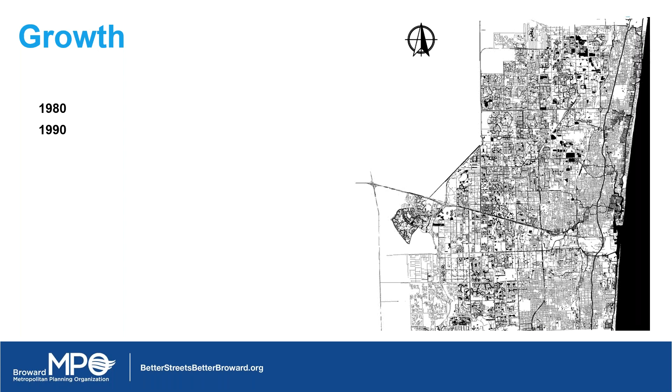A quick look at Broward since 1980. This is really when a lot of things happened. We experienced some rapid population growth, especially in Southwest Broward, which is closer to Miami-Dade County. New types of development occurred. We're starting to see some different development patterns happening here. A lot of cul-de-sacs, a lot of gated communities, not really conducive to walking and biking. Our population in 1980 was about a million, and now, as of 2019, we're close to 2 million. So we probably doubled our population in the last 40 years.

So to keep up with this population growth, the Broward MPO and its partners, the cities and the county, invested heavily in our transportation system. New roads were constructed to high capacity. Existing roads were widened from 2 lanes to 4 lanes, 4 lanes to 6 lanes, and in some cases, we actually widened our roads to 8 lanes. There's a few roads in our transportation network that are 8-lane divided roads. Not much consideration was given to other modes of transportation.

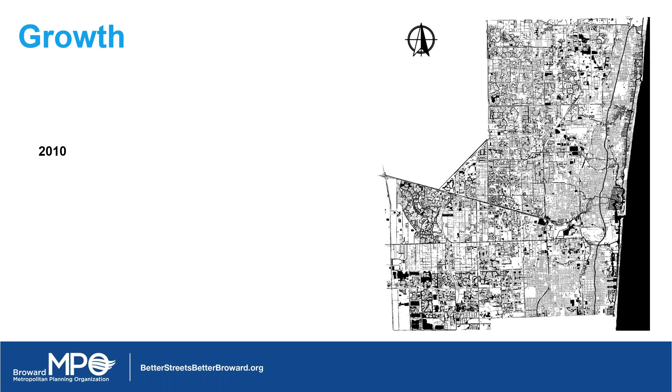In the late 1990s, our MPO gave us direction to look at alternative ways to add capacity without having to add additional lanes. As moving vehicles was the priority back then, and as the smart planners that we were, or thought we were, we expanded our intersections. So we added free flow right turns, dual rights, dual lefts, creating an environment that's really not suitable and doesn't encourage people to walk and bike. It was definitely carrying a lot more cars. It was definitely more efficient for automobiles, very, very difficult for people to walk and bike.

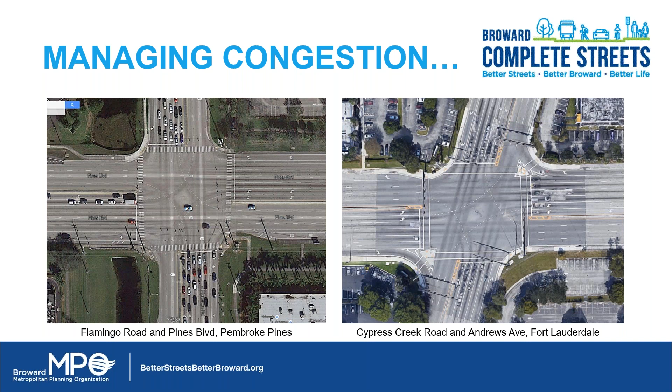However, everything changed with the adoption of our 2035 long-range transportation plan. This plan was adopted by the MPO board in December 2009, and it really changed the way we do our planning here in Broward. It created a paradigm shift, if you will. It focuses more on moving people, not necessarily vehicles. For the first time, it allocated a lot of funding for other modes of transportation, not necessarily capacity improvements.

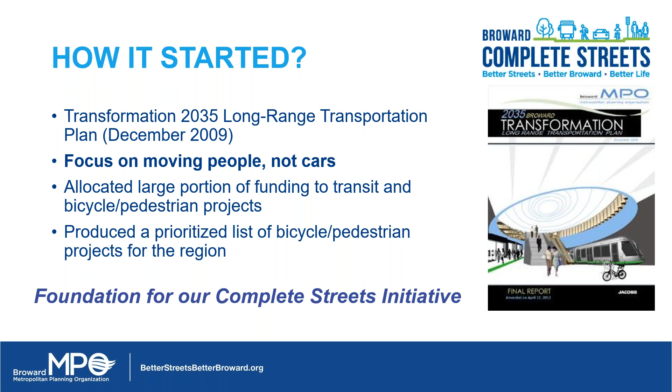About 70% of the funding allocated in this plan was for modes other than the automobile. Complete shift from the past. Typically, capacity will carry about 60 to 70% of the funding, with the remaining to other modes of transportation. And for the first time ever, we did have a list of bicycle pedestrian improvements. In the past, the only way we could actually implement bike lanes and sidewalks was through a capacity improvement. So this clearly changed the way we do our planning here in Broward.

Quickly, I guess we all understand complete streets, but even at that time it was sort of an emerging concept. We heard it was coming out of LA County. Proven results. The data was showing that when you plan, design, and operate streets for all users, you get all these benefits. First and foremost, safety. You create healthy communities. You definitely improve the economic vitality of your area. So we found that the benefits actually were something that we wanted to promote.

Kristin Jacobs, a former MPO board member, directed staff to look into this concept and really find ways to implement it here in Broward. So she became the champion of complete streets in Broward County. So now we have this concept that we want to promote. We have a list of projects from our 2035 long-range transportation plan, and we have funding. So what do we do next? These are the steps that we took to actually try to implement the complete streets concept here in Broward.

We developed an education and training program, which became the Complete Streets Initiative. We developed a process in partnership with the Florida Department of Transportation District 4 office called the Mobility Program to get projects from planning to implementation. And we established good partnerships with the local governments, the jurisdictional owners. We actually needed to get their buy-in so we can implement projects. The Broward MPO does not own real estate, does not own any roads. So we need to make sure that the partners are on board with this concept so we can implement this type of improvements.

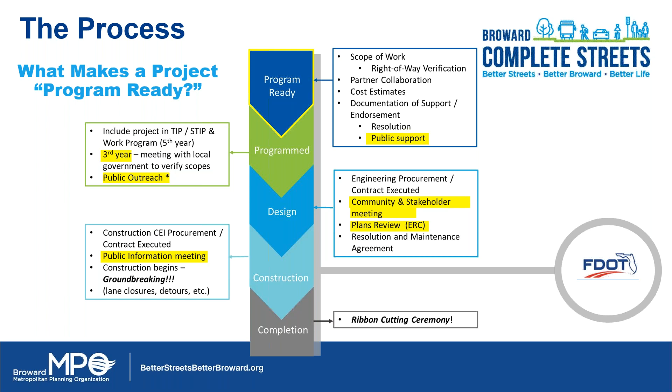You know, we're very lucky here in Broward to be working with a very progressive, innovative FDOT. The District 4 office has been one of our most important partners since we established the initiative. They have embraced the concept of complete streets. They have updated internal documents, developed new documents and processes, all in an effort to make the street safe for all users.

So I'm going to turn it over to Brad Salisbury, who will provide a little more information about FDOT's efforts, including the lane elimination process that was established here and piloted here at the District 4 office. And he'll also highlight some of the projects that include those spectacular 7 strategies. Brad, turn it over to you.

Thanks, Ricardo. Yes, as Ricardo mentioned, I'm Brad Salisbury with the Florida Department of Transportation District 4 Design Office. We are located in Fort Lauderdale. As Ricardo mentioned, I wanted to highlight the mobility program, sort of those steps after the MPO takes to make sure the projects are program ready, and just highlight how this mobility program is really advancing complete streets in addition to the spectacular 7-step countermeasures that I'll highlight. Ricardo mentioned lane elimination. I'll touch on that a little more in depth.

So before I got into the mobility program, sort of concurrently while the MPO was thinking about complete streets and really rethinking how these roads in Broward are working, FDOT as a whole was developing what we call context classification. And this was just taking a step back from the strict urban-rural separation that had been used in the past, and break down those roads a little more in depth into categories. Everything from C1, which is the natural park area, all the way to the C6 urban core.

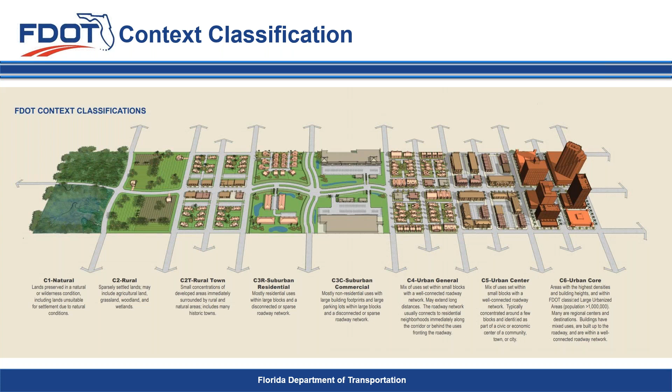So when you're looking at what makes sense in the urban core, that may not be a complete street for the C1 natural area. So really tailoring the complete street concept to better suit that area that we're serving, and everything in between, from your rural town to more suburban areas, and as you get more and more dense to your urban core.

So this context classification determines a number of roadway design criteria, everything from lane width to your design speed to your sidewalk width. Our Florida Design Manual breaks down all those criteria into the categories for C1 to C6. And as part of this context classification effort, DOT conducted a statewide effort to assign a context class to each road. This was more of a 10,000-foot view of maybe looking above on an aerial of, okay, this area is definitely a C1, a natural area. Okay, this is urban core, and what we call the statewide provisional context class.

And as a project comes through and we have the chance to further refine that, we have a process that I'll outline below. It's utilizing the multimodal scoping checklist. So after the statewide provisional context class is set, the multimodal scoping checklist is created by FDOT, where we'll really look at more of the street view level analysis for the road. So getting down there and really seeing, okay, what is this, a suburban area? Is this more of the rural town? Less of the 10,000-foot view and more of the street view. And we'll assign its context class at that point for the project.

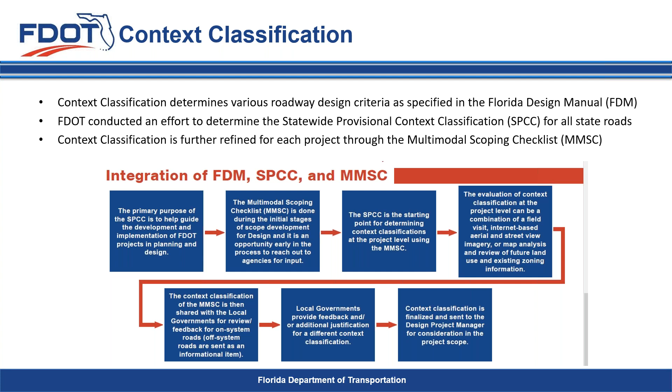Now we provide the local governments this provisional context class and give them the chance to give us feedback. And sometimes a discussion will happen, and the city or county may have different plans in the future for this roadway, and a final context class is sort of set for consideration into the project scope. So this is important because it sets those criteria early before the design project begins of, okay, what are our widths going to be in developing the project further down the road?

So now I'll take a step back to the mobility program and kind of highlight what we're doing for the Safe Transportation for Every Pedestrian countermeasures. In this mobility program, these are often included by request of the local agency or through an FDOT safety study or a safety review for an FDOT project where these countermeasures are identified for incorporation into the projects. Or sometimes it could be just a local agency making a one-off request and DOT conducts a separate study to

incorporate them. The countermeasures, as Dan highlighted before: the raised crosswalks, crosswalk visibility enhancements, pedestrian refuge islands, pedestrian hybrid beacons or HAWKs, the leading pedestrian interval, rectangular rapid flashing beacon or RRFB, and road diet. I'll touch on that last one a little more in depth, but I'll briefly run through the first six.

So as I mentioned, incorporating these STEP features into the mobility program and Complete Streets projects is really a partnership between us, the MPO, and local agencies. I've highlighted the raised crosswalks; one key feature was implemented on a non-state road, Old Dixie Highway in the city of Fort Lauderdale. That was a partnership with the MPO and the city of Fort Lauderdale to really make that a more walkable, complete street for the community, and it incorporated several raised crosswalks.

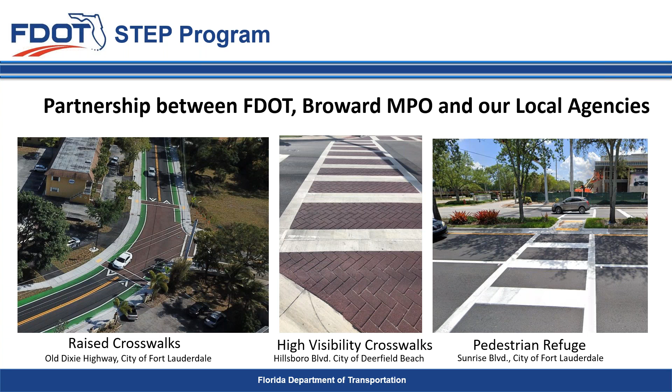Pedestrian hybrid beacon, or the HAWK, we do not have any installations of those in Broward County, but we do have those at other places in District 4. We cover five counties in South Florida, and the five installations we have in our district are all in St. Lucie County along A1A.

The STEP countermeasure is really a leading pedestrian interval, and we have several locations in the district with a leading pedestrian interval, but I just wanted to highlight the exclusive pedestrian phase we do have active at some extremely high volume pedestrian areas like this beachfront A1A in Fort Lauderdale. That gives an all red phase where all pedestrians are crossing.

And to go to a different section of A1A, in Lauderdale-by-the-Sea we have the RRFB installation. This was by request of Lauderdale-by-the-Sea, a heavy beach access route that was being utilized and really needed some additional assistance for the pedestrians to cross. So that was done as a project by FDOT for Lauderdale-by-the-Sea.

And the last, and what I'll dig into the most, is what we're calling lane repurposing. It has a few different names: lane elimination, road diet, lane repurposing. DOT currently calls it lane elimination, so I'll refer to it as that. But we are working, at DOT's statewide level, on a repurposing guidebook that I'll highlight on the right. This process is currently outlined in the Florida Design Manual to guide applicants through. The upcoming lane repurposing guidebook is still going to follow the same process generally. It just gives a little more background information.

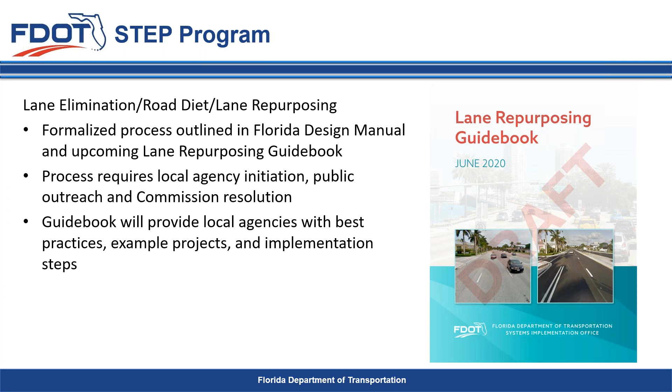So just to highlight the number of lane elimination projects we have in our district, we actually have 29 state road projects in various degrees of completion. Five have been fully constructed, and the other 24 are a mix: they've been identified as potential lane eliminations or approved.

Inactive, meaning the locals had once looked into it but withdrew that application. Or active, they're currently going through the lane elimination process. So these are the 29 state road projects. I'll highlight the 29 non-state road projects on another slide, just to give a better view of how this whole region is really active with almost 60 projects of lane eliminations in one stage or another.

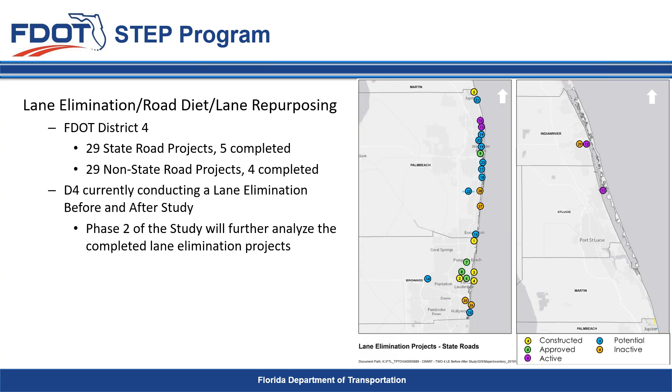And as we've had time to assess those 5 completed projects, we're conducting a before and after study. DOT District 4 is. Phase 2 of the study is going to dig a little deeper into those completed projects to see tangible cost benefit type analysis. Phase 1 really got feedback from all our partners on how those are performing in the years after, but we really want to have hard data on how these are working out to help better manage the 50 odd projects that are coming through the pipeline.

These are the 29 non-state road projects I alluded to. Some of these, DOT has an active role where we're actually designing and constructing. Others are solely on the local agency, but we did want to capture every project in our region that's going through this. As you can see, the vast majority are in Broward County. So definitely the local agencies in Broward County have been more aggressive at pursuing lane eliminations. We do have a couple in Palm Beach County.

So I wanted to highlight a few of the lane elimination projects in a little more detail. This was on a state road, Hillsboro Boulevard in Deerfield Beach. This actually started as an FDOT resurfacing project. Through discussions with the local agencies, namely Deerfield Beach, the lane elimination scope was added into the resurfacing project. We used shared funding since DOT was coming with resurfacing. It could facilitate that cost for lane elimination a little bit, but we did have Deerfield Beach contribute some

funding to the project. In the final project, you'll see here on the right that we installed a bike lane and a landscaping strip with that eliminated lane. And that is completed. I was actually the engineer of record during construction, and we've definitely gotten some good feedback from our local agency partners on this one. It's being used as one of the example projects in the draft repurposing guidebook.

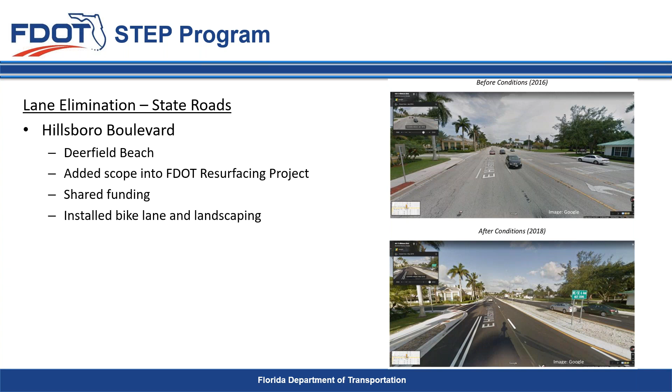Another one on a state road was A1A in Fort Lauderdale. This actually started as part of a Hurricane Sandy repair project. A large section of A1A was washed out, and first emergency repairs were done. But as we met with Fort Lauderdale and focused on how we should remake this road, we took that opportunity to re-envision it for what the city saw. And part of that was incorporating a lane elimination.

I'm unsure if it was actually the first, but it's one of the first lane eliminations that was done, and it also included shared funding. With that eliminated lane, we had a bike lane, median, and many decorative improvements funded by the city of Fort Lauderdale.

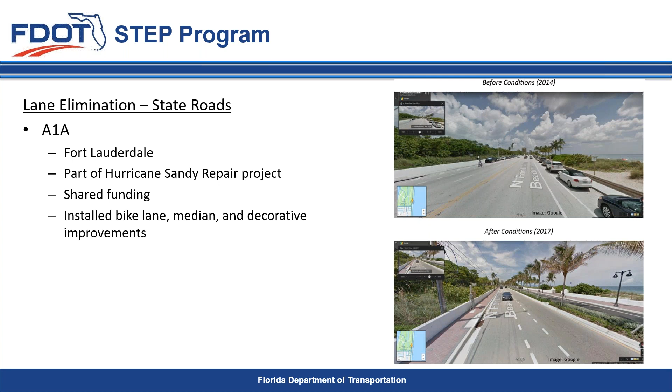Just to highlight a couple of the non-state road lane eliminations, we have Northeast 13th Street. This was solely designed and constructed by the city of Fort Lauderdale. It was part of a larger network of lane eliminations, including one that DOT had worked on, the Old Dixie Highway project. The city revitalized that whole area and corridor with this project, and added a bike lane and median, including landscape features. You can see on the right that green bike lane is continuous throughout.

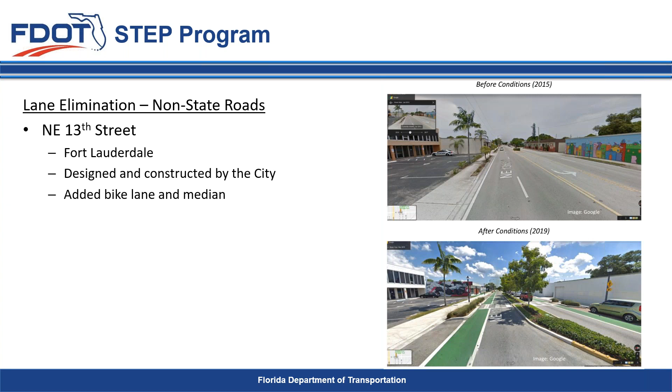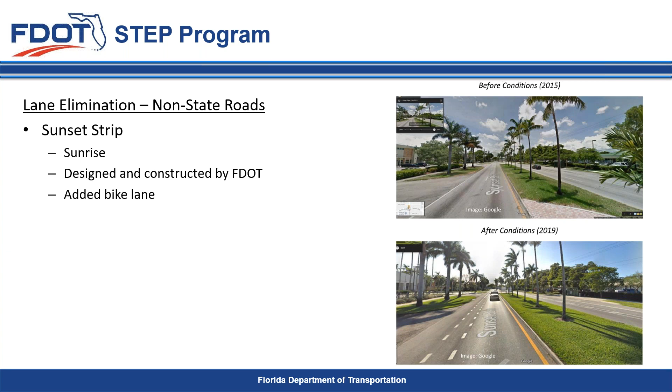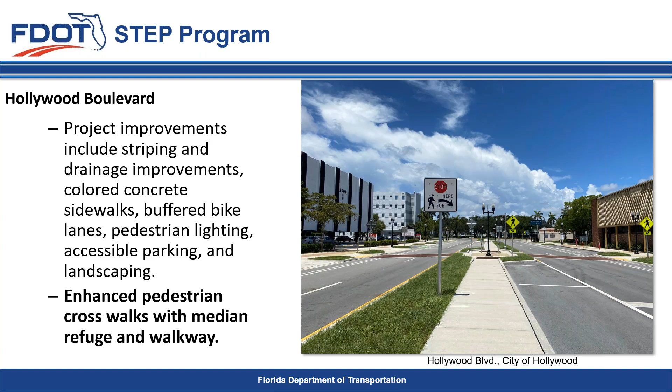spaces and landscaping. The key feature was the enhanced pedestrian crosswalks with a median refuge and walkway down the center of the project. And that's been constructed. Some future landscaping is still pending, as you see in this picture, but it's been a great example for the rest of the county and our district for what a complete streets project could be. With that, I'll hand off back to Ricardo to discuss that project a little more in depth.

Thank you, Brad. Yeah, the Hollywood Boulevard project in the city of Hollywood was actually one of 2 complete streets demonstration projects that we selected. We wanted to show how context plays a big role when selecting the appropriate treatments. Although the concept is the same, the treatment may vary depending on the context of your road.

The Hollywood Boulevard was our urban demonstration project. Believe it or not, that's as urban as it gets in South Florida and in some of our cities here in Broward County. The destinations are a little different. They're retail, office, restaurants, shops, and actually this one provides direct access to the city hall.

Ricardo, I'm sorry, I hate to interrupt. We don't actually see your screen yet. Could you see if you have that show my screen button? Sorry. I got it. I apologize. I didn't realize. Can you guys see my screen? Got it. Yes, so thank you.

The same thing applies. Basically, this is an urban complete streets demonstration project in the city of Hollywood. Like Brad said, this is not complete. It's still missing a lot of elements. Through our partnership with the city of Hollywood, they were responsible for the landscaping, some hardscaping, some furnishings that are coming up, hopefully at the end of this year. And of course, it's missing a very important element: the trees, the shade. It's very hot here in South Florida, so we need to make sure that gets implemented soon.

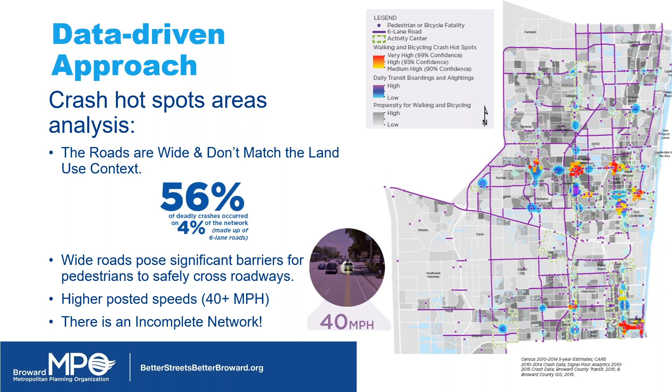We developed project fact sheets for each area selected. We conducted field reviews during the morning and also in the evening to identify pedestrian and bicycle safety related issues for each site. We worked with a lot of partners, including municipality representatives, elected officials, school board members. Some of our residents came out and walked with us as well. AARP, Broward County Transit, the Florida Department of Transportation, and law enforcement officers as well.

Some of the countermeasures that were actually recommended, common themes in many of these sites, include improved lighting, adding separations from vehicular traffic, maintenance issues, transit amenities that needed more shelters, and also that we need to include more mid-block crossings.

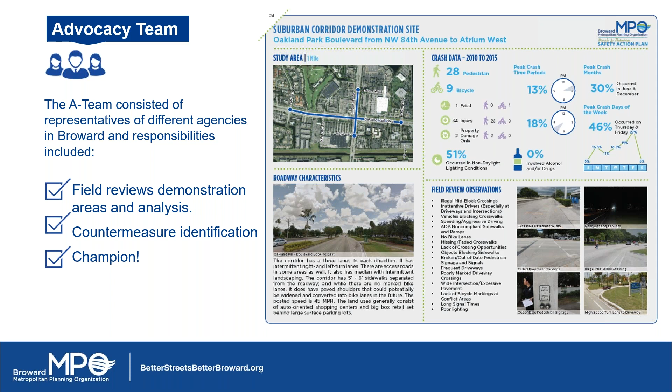Some of the findings: definitely there's an identity crisis between the road designs and user needs. Absolutely, that's also absolutely true. The roads are not primarily designed to provide a comfortable and convenient walking or bicycle experience. Absolutely, that's the case. It's more about how do we move vehicles efficiently and quickly. And many users of the systems are not following walking, bicycle, and driving laws. Not many people are aware of the actual laws that are in place. Strategic partnerships are needed to see the change.

So this is the outcome of the plan. It calls for some priority action items. Identify areas where bicycles and pedestrians are the priority movement. Implement a quick build program. That's something that we'll talk about in a minute. Align standards with bicycle pedestrian safety goals of the region. Institute a district-wide bicycle pedestrian safety program. And also create an education program with law enforcement that focuses on bicycle pedestrian laws.

So, this is the implementation part of the BIPSAP. These are the calls to action established by the BIPSAP. So first, set the stage. Identify areas in the county where bicycles and pedestrians are the priority movement. We're actually taking care of that with our complete streets master plan, which we'll show in a minute. Create safer streets. Implement the quick build program. We're in the process of establishing our first tactical urbanism program here in Broward County. We're hoping to have that stood up by the end of this year. We also recently updated our complete streets design guidelines to include recent standards and innovative designs.

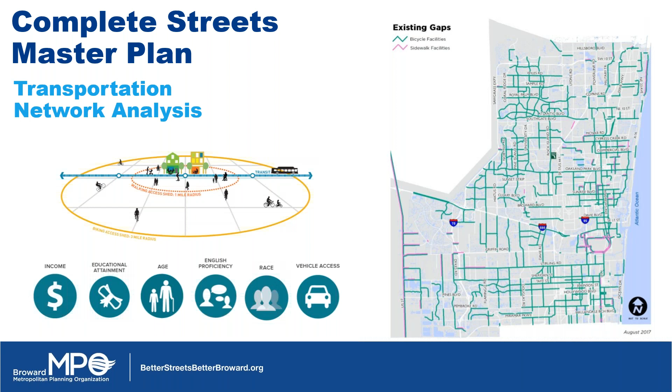Okay, the Complete Streets Master Plan, this is a direct result of one of the priority items from the BIPSAP, adopted in February 2019. We do have a more robust presentation, but we just wanted to make a couple of slides to show what exactly we did. We started with existing gaps. Where are the gaps in our transportation network? But the different thing is we also included what we no longer consider facilities, like 3-foot shoulders, wide outside lanes, or 4-foot bike lanes. We've seen that those facilities are not being used, so we consider those also as gaps.

We did a demand analysis. We looked at areas with higher number of destinations, employment, retail, shops, parks, trails, schools, and higher population density, and also transit. We overlaid that analysis with our equity analysis. The equity analysis considers demographic factors which, when combined, indicate where there are concentrations of historically vulnerable populations. The indicators that we used were income, educational attainment, age, English proficiency, race, and also households with zero cars.

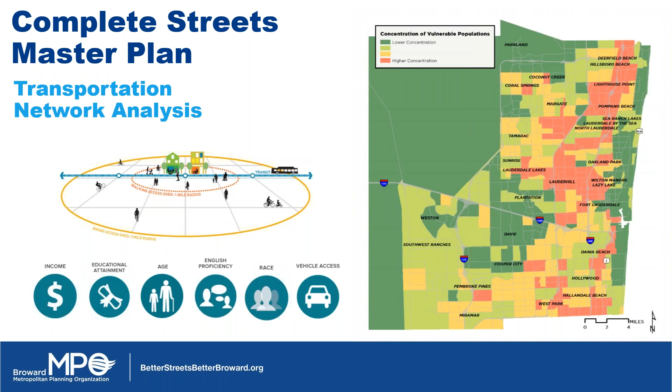When we overlaid the two analyses, this is what we came up with, what we call the bundle areas, where we create a tight network of facilities with higher number of destinations while prioritizing our investments in areas that have higher numbers of vulnerable populations.

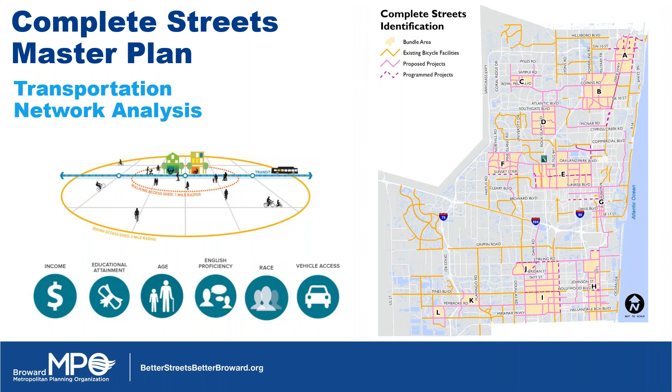The whole idea behind this bundle concept is really, sometimes we forget that we do more than just go to work. Only 20% of the total daily trips are work trips. Sometimes we forget that we go shopping, we go to the gym, we go eat out at restaurants, we go to our parks. And for some of us who have families, we have to take our kids to soccer practice, baseball practice. So it's almost like a second job. So the whole idea is to provide access to everyday destinations to people, so they can consider those different modes.

Right. As part of the Complete Streets Master Plan, we did have one of the most successful campaigns that we ever had at the Broward MPO. We interacted with over 1,300 resident stakeholders. Not typical in the planning world. Transportation is not sexy to some people, so they don't really participate when you're planning. They'll really come out when you're actually ready to design and construct.

So we utilized different methods of public outreach, but the most successful strategy was to leverage an existing relationship the Broward Regional Health Planning Council had with local communities through their Healthy Community Zone program. These are low-income areas that have historically been neglected. So we actually went to them. We got some good feedback from those community zones, and we were able to incorporate some of the things that they were saying into our actual recommendations.

Some of the things that we found are pedestrian lighting, traffic calming measures, and of course, people need shade. So overarching themes from the public outreach: people want connected networks, which we're addressing through our bundle areas on our Complete Streets Master Plan. They want access to everyday destinations, which we're addressing through our demand analysis. And definitely, they want those separations. They don't want to be right next to vehicular traffic. It's kind of dangerous, especially on higher speed roads.

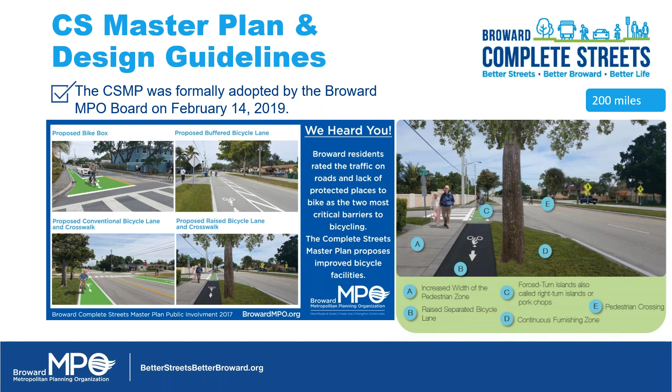So one of the most exciting programs that we have at the Broward MPO is our walking audit program. The whole intent is to get the community involved and get people to actually start walking with us before we start planning and scoping projects. So not only do we engage the public and stakeholders, but also our partners and engineering planners. We really need to start planning and engineering some of these projects from the user's perspective. So we need to walk and bike when we're actually designing these projects.

So Stephanie Garcia, who leads this effort, is going to talk a little bit more about this program and provide a little more information on that. So I'll turn it over to you, Stephanie. Let me know when you're ready.

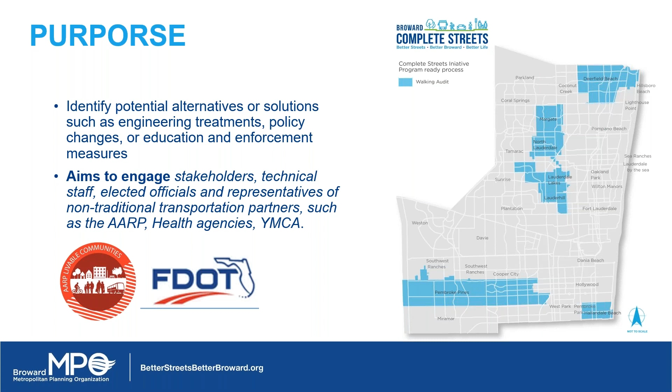Thank you. So to make this possible, the Broward MPO successfully funded the Walking Audits program through the Complete Streets Initiative. A question that comes to your mind could be how it works. The walking audits are coordinated with city staff and hosted in different locations, such as schools, parks, community centers, local businesses, depending on the urban context of the study area and the needs of the municipalities. So it is a flexible approach.

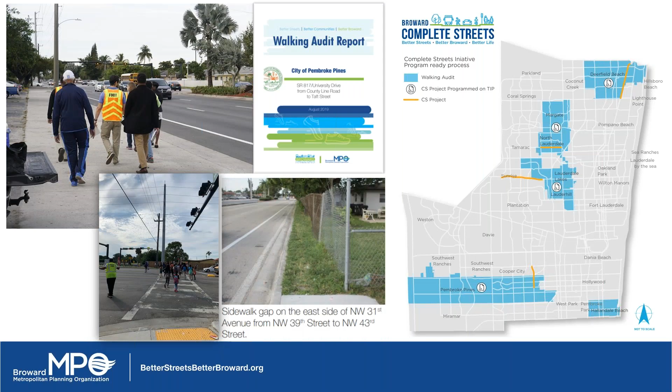Thank you. The walking audits help evaluate the walking environment, identify pedestrian and bicyclist issues such as safety, access, connectivity, ADA needs, comfort, and convenience when walking. With the help of participants, we identified potential alternatives and solutions such as engineering treatments, policy changes, education, and enforcement measures. All this information is compiled in a report that is shared with the walking audit participants, city staff, transportation partners, and jurisdictional owners of the road. This is an important part of the process, as they will actually implement the improvement.

As you can see in the photo, there is an example of one of the walking audits in the city of Lauderdale Lakes, where 3 schools are located: elementary, middle, and high school. There is a sidewalk gap and disconnection to the nearest bus stop, as you can see. This is a call of attention to act and plan for better streets. The Broward MPO uses guided feedback to inform the project scope, ensuring the needs of community members and stakeholders are clearly reflected in the final recommendations of the project.

And the good news is that in 2020, the MPO programmed for funding 4 out of 6 projects that belong to the first phase of the Complete Streets Master Plan, as you can see in the map, that included a walking audit. So of all the projects that were programmed for funding, 4 out of 6 included a walking audit. This shows that it was a successful tool of public involvement, getting the feedback of the community into the scope of the project. And right now we have 4 projects in the TIP.

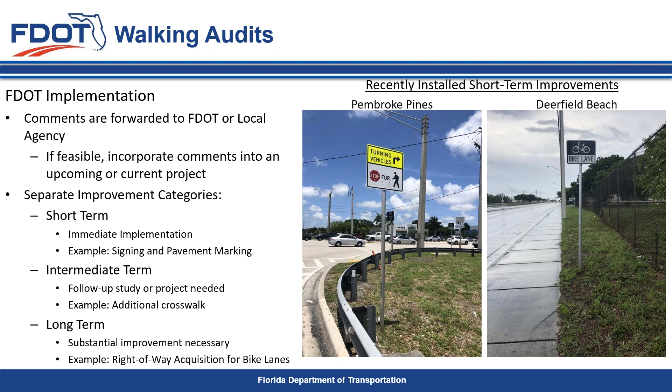And finally, we have long-term type comments that would be considered a substantial improvement. Perhaps right-of-way acquisition or widening the roadway for bike lanes would be considered these. For these long-term enhancements, we work with the MPO and the local agencies for potentially scoping a future project if deemed warranted, and it just helps highlight to the local agencies, the MPO and FDOT, at the street view level, here's what people are saying is needed. And I'll kick it off to Ricardo next to talk about what's coming up in the pipeline.

Thank you, Brad. Definitely, FDOT has been a great partner, even taking some of the recommendations regarding maintenance and operational issues that we identified through our walking audit. It's been amazing. So thank you for doing that. So what's in the pipeline? What's coming up? What's the result of our current efforts? And what do we have coming next?

Okay, here we go. So a mobility program. This is as of December 2019. This is through a partnership with the Florida Department of Transportation. We wanted to show you that we have projects in all phases of implementation. These projects were identified in many of our plans, studies, or other efforts, totaling approximately $300 million and adding about 195 facility miles to our network. This doesn't include the 77 miles that we're actually getting program ready for our Complete Streets Master Plan projects.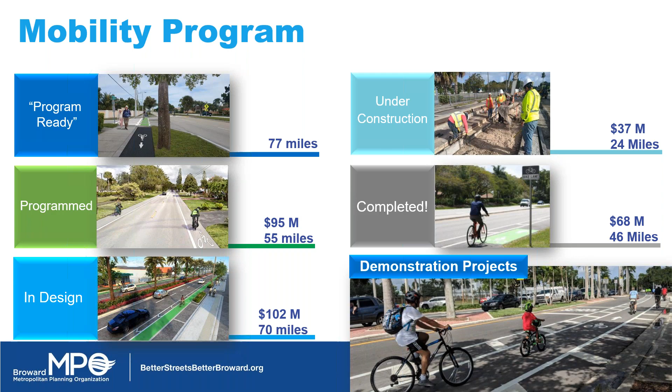So in addition to our mobility program, we have other funding mechanisms in place at the Broward MPO, and have also been able to secure other types of funding to allow us to implement these types of improvements. The mobility program is certainly not the only way to get projects funded at the Broward MPO.

So our Complete Streets and Localized Initiatives program is another funding mechanism we have in place at Broward MPO. It's a competitive grant program where we do a call for projects every year where local municipalities can apply for funding. These projects typically are lower scale projects with a maximum project cost of $3 million. This program was established in 2016. What you see here is only the projects that are on what we call our regional network, collectors and above. Through that program, we're going to be adding 20 miles of facilities to our network.

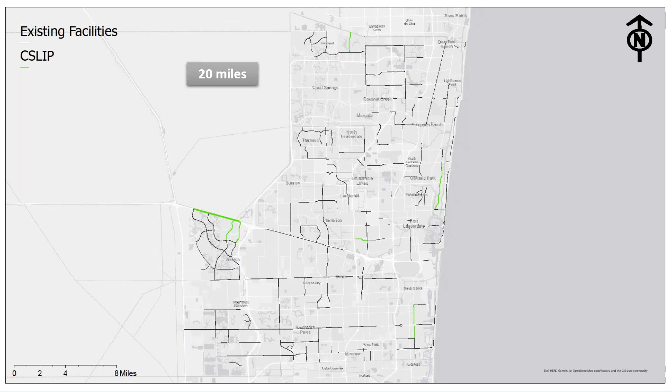In 2016, the Broward MPO also partnered with 4 municipalities and Broward County government to apply and successfully receive a TIGER Grant for projects. Through that grant, we're also adding 9 miles of facilities to our network. Construction on this project actually is starting, I mean, in summer it's slated to start. So we're going to be adding an additional 9 miles of facilities here as well.

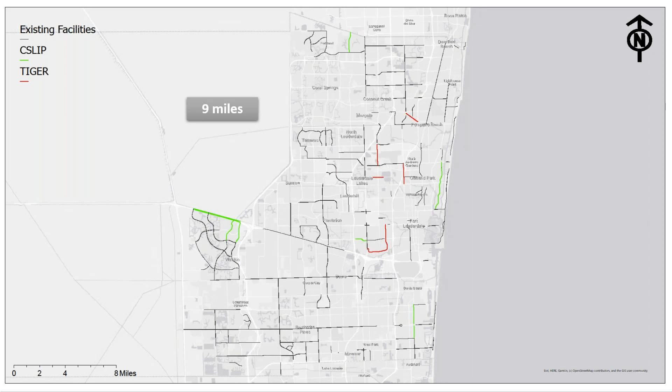Our mobility program, what you saw in the previous slides, will be adding 195 miles of facilities to our active transportation network. So in total, we have approximately 224 miles of facilities that have been programmed in our transportation improvement program. That means funding has been assigned. So really, in the next 5 years, we're going to have an additional 225 miles of facilities implemented on our transportation network. And last, and certainly not least, are phases 1 and 2 of our Complete Streets Master Plan. As Stephanie mentioned earlier, 4 projects of the first phases have already been included in our TIP.

What this map does not show is some of our local partners' efforts. Some of our partners already moved forward with implementing some of these improvements with their own funding, with local funds. Unfortunately, we weren't able to get that information in time to include it as part of this presentation, but definitely there's a lot more going on than what you see here.

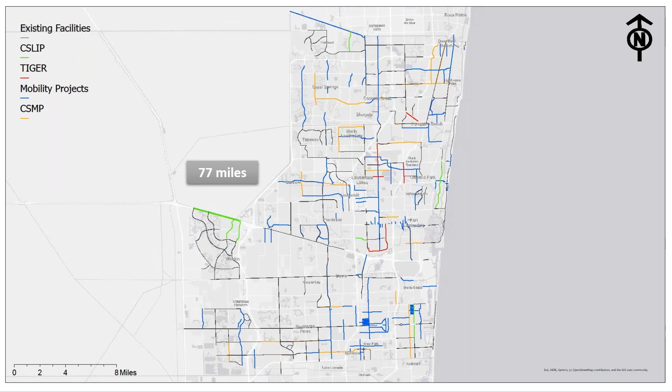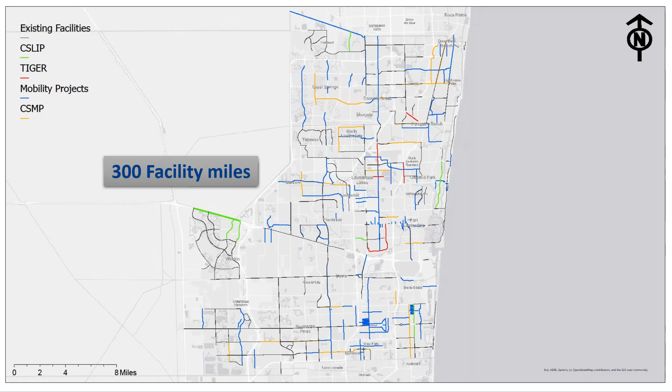So once everything is implemented, we're going to have approximately 300 facility miles added to our active transportation network. Some of the lessons learned, I think this is very important. Definitely establish champions at all levels, at the community level, technical, believe it or not, technical. We want engineers to be proactive and progressive, and more importantly, at the political level, especially if you're doing lane eliminations. Lane eliminations are key. So you need to have somebody at the commission who can speak and champion a project.

We had issues when we did everything that was requested. We had elimination analysis completed and approved by technical staff with the public outreach, and projects can actually be killed at commission. So getting that champion at that commission level is very important. Through our process, definitely public outreach. We need to do public outreach early and often. Again, the political support, we need to have that political voice, the political champion to champion some projects.

Interagency coordination, one of the things that, again, I think I talked about this a little earlier, that we're finding that a lot of the local governments were actually moving forward with plans without consulting with the owners of the facility. We want to be able to fix that. And also intra-agency coordination, because as planners, we typically deal with planners. So we're moving forward with projects, and our counterparts at the cities, we're not really communicating with the engineers, with public works. So that's something that we definitely are aiming to correct.